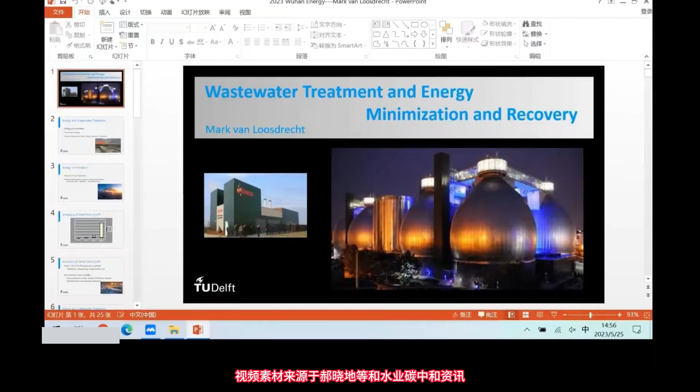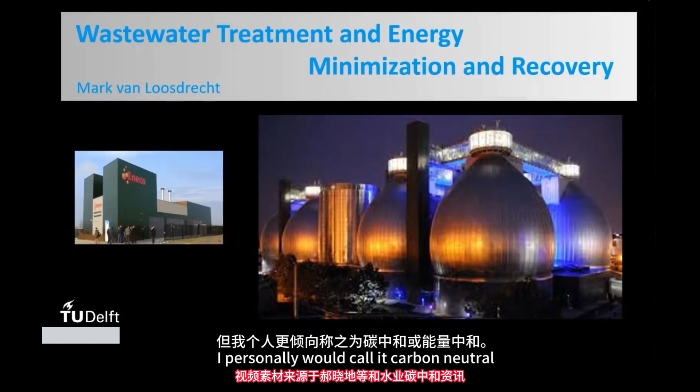I will try to tell you about our thoughts on water and energy. They are intermixed because you need a lot of energy to treat water, and wastewater can also contribute to energy generation. I'll share some thoughts on the development of carbon neutral or energy neutral treatment plants. There are 3 points I want to briefly address: energy minimization, production of energy, and resource recovery and its integration with energy or carbon neutrality.

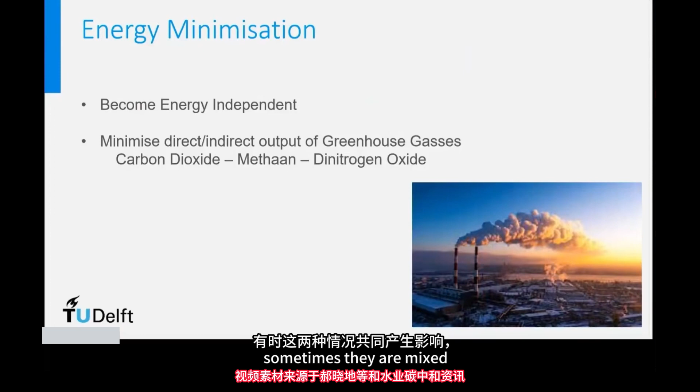Energy minimization for wastewater treatment plants has 2 main drivers. One is to minimize energy and become energy independent from the electricity grid, for all kinds of reasons. The other motivation comes from climate change - you want to reduce CO2 emissions, which is strongly related to energy consumption. Both arguments are used, sometimes mixed, but it's good to keep them separated.

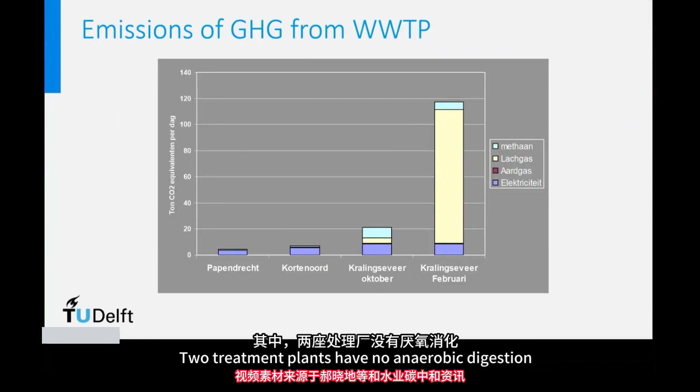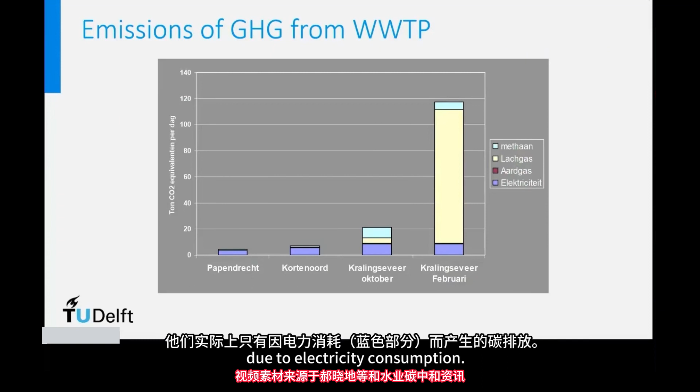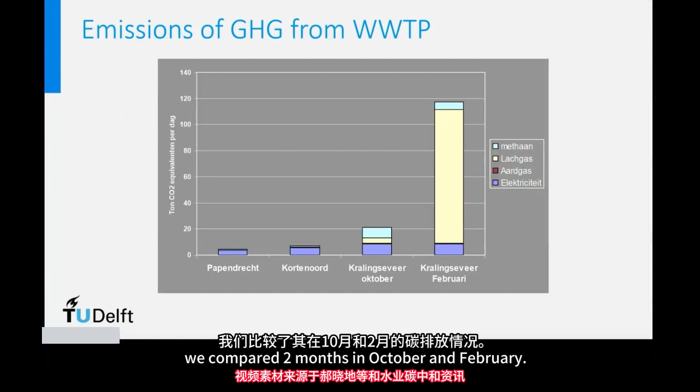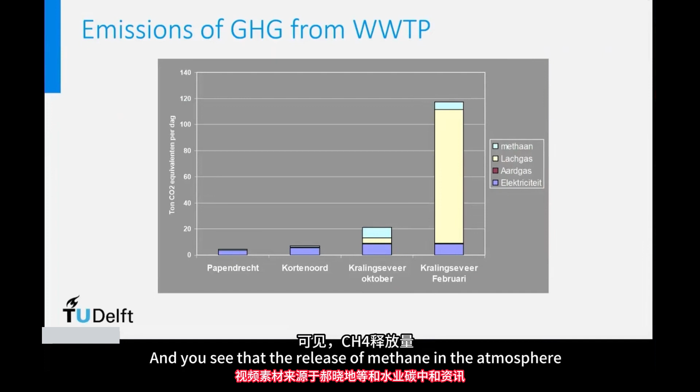If you look at wastewater treatment and greenhouse gas emissions, initially we think about energy use and CO2 emissions. But looking at different treatment plants, there can be big variability, even within one plant. This is a picture from 3 treatment plants in the Netherlands. 2 have no anaerobic digestion, only aerobic mineralization, and have only CO2 emissions from electricity consumption. The 3rd, Kralingseveer, has anaerobic digestion - comparing October and February, the light blue is CO2 footprint from methane release into the atmosphere.

The methane release almost equals the CO2 related to energy production for the treatment plant. So that methane release is very important to recognize if you try to minimize energy by implementing anaerobic digestion while at the same time letting methane escape into the air. I'm not sure that helps the climate a lot in the long run.

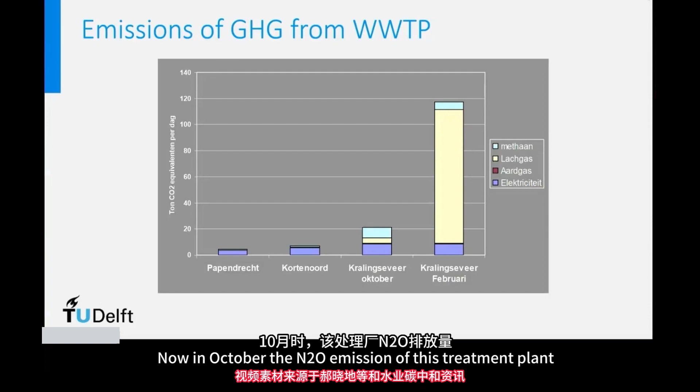The second compound of interest is N2O. In October, the N2O emission of this treatment plant is relatively small, but in February it's almost the only relevant factor. This is the problem with N2O - it's highly variable and not predictable at the moment.

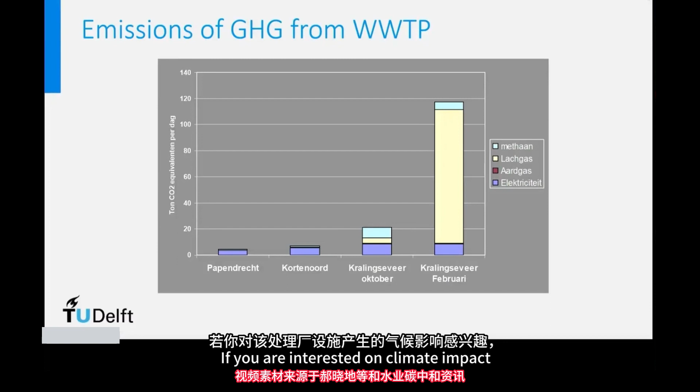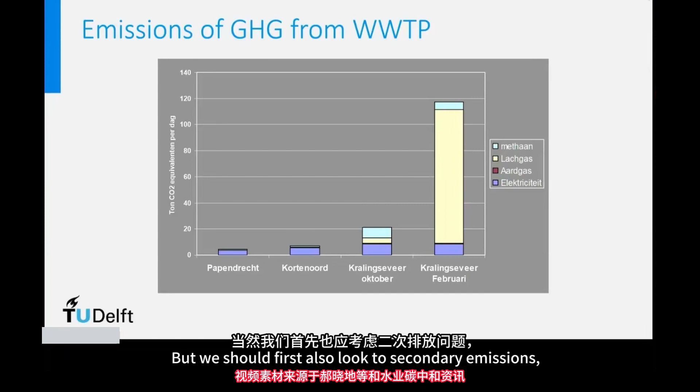If you're interested in minimizing the climate impact of treatment plant facilities, we can look at energy minimization, but we should first look at secondary emissions - methane and nitrous oxide. In the Netherlands, at wastewater treatment plants, of all the methane produced, 5 to 10% is emitted into the air. I can assure you these plants are well monitored, operated and maintained - these are just side emissions happening. They can be prevented if you pay attention, but normally that hasn't been done in the past. It's very important because it's a significant climate change impact.

Certainly if you implement anaerobic digestion because of energy or climate change, this is a very important aspect. Now N2O is much more difficult - we're still doing research, and it would take a long time to go into all the details, but this is a very complicated process which has not been solved yet, despite maybe some claims here and there.

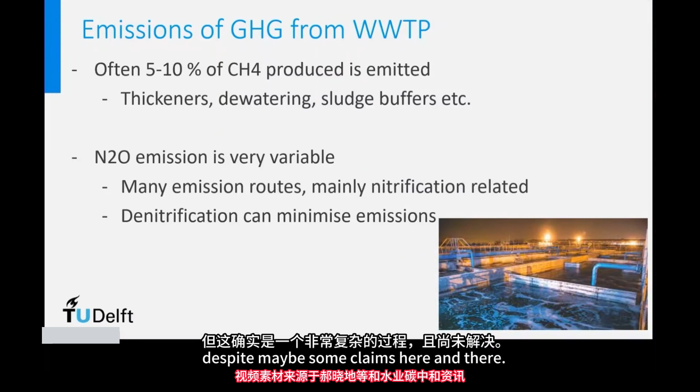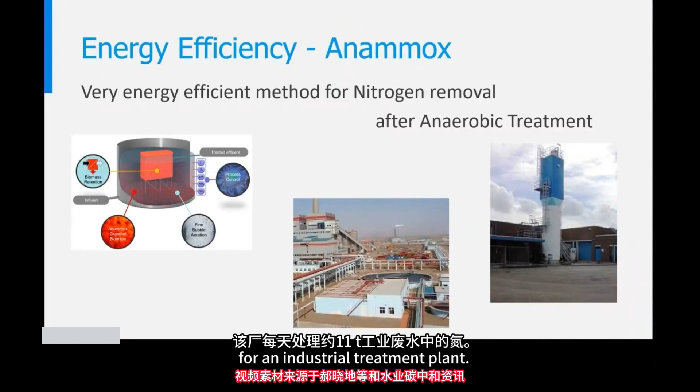For energy use minimization, we can make new processes. I'll show you 2 - one we developed around 2000, in the 1990s: the ANAMMOX process, anaerobic removal of ammonium from wastewater. That's a very energy efficient process after anaerobic digestion - if you first have anaerobic treatment, the water contains only ammonia, making it a very efficient nitrogen removal process. This is implemented worldwide, mainly for industry after anaerobic digesters. The biggest ANAMMOX installation is here in China, treating around 11 tons of nitrogen per day for an industrial treatment plant.

There is talk of making this process available for municipal wastewater treatment. But bringing ANAMMOX to municipal wastewater treatment itself does not save a lot of energy. It would only save energy if you can remove all the organic carbon from the water without oxidizing it and bringing it to a digester. This step is more complicated maybe even than the ANAMMOX process itself, although academic attention is mostly on ANAMMOX. If we really want to take this seriously, we need to look very well at COD capture and bringing it to the digester.

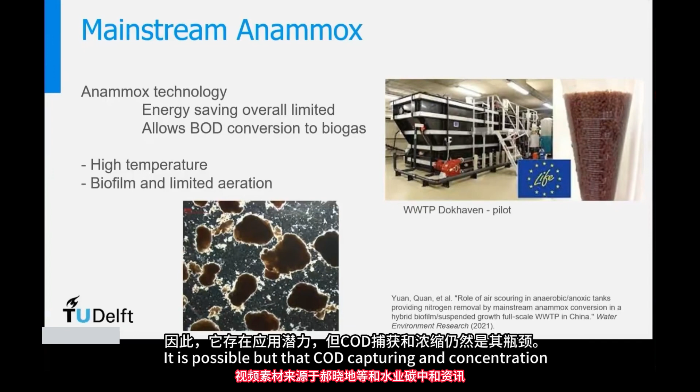Technically there's in principle no problem. We have run a low temperature ANAMMOX reactor pilot plant on municipal wastewater for a prolonged period. It can operate stably. There are examples from high temperature countries where it occurs more or less spontaneously - there's a nice example from the Xi'an treatment plant here in China where spontaneous ANAMMOX has been observed. It is possible, but COD capturing and concentration is still actually the bottleneck for making it more energy friendly.

The second technology is based on granular sludge - we developed understanding of how bacteria can grow in granules. With that knowledge, Royal Haskoning DHV and also BCC and a few other companies are trying to implement technology making use of the fact that bacteria grow in granules. The advantage is you don't need the clarification step because the granules settle so fast you can do the settling inside the tank, meaning you need much less pumping energy.